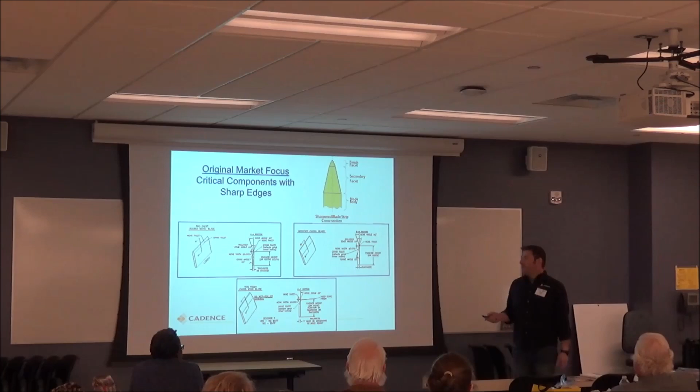Some examples of the stuff we make - these guys here that look pretty gnarly are for extrusion cutoff, so pipe and anything that comes out of an extruder gets cut to length that way.

These guys here are winder blades. I get excited about winder blades because they're meant for cutting things like Oreo cookie film and other really thin films that come off the roll - the rolls are typically about 88 inches long, and these blades stand up and basically slice it. Then we have other blades called slitter blades that slit them to a discrete width, so you're left with a rectangle of film.

There's some ones on here I don't remember what they are - I think this one cuts the heat shrink wrap you see around the top of a mayonnaise jar. Yeah, you can thank me for that. As they put that film around, they heat it, and right after it's in the heating process, this blade comes in and slices the film, then it heat shrinks the rest of the way around.

But they come to us, they shop with us. We're not the cheapest around, but we know how to make a keen edge, and we're willing to do it to whatever shape you want. That's kind of our primary objective here.

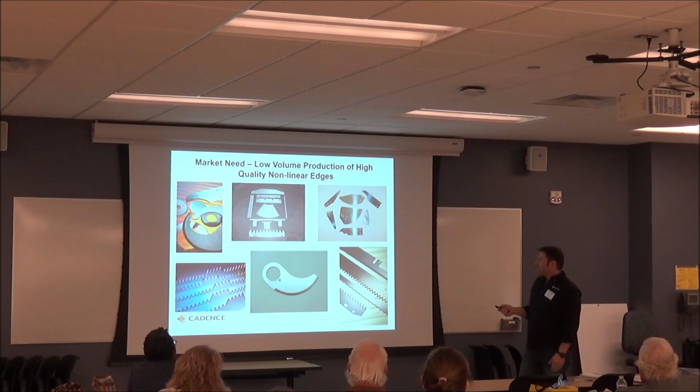So how do you sharpen an edge? These are grind wheels here. Have you ever ground anything on a bench grinder? Whenever you grind, you get what's called burr - basically it's the material that you plow out. The roughness of your wheel digs in, plows the material, and carries it out to the edge.

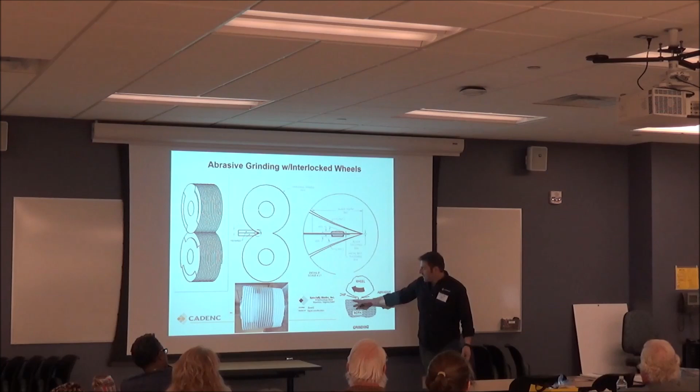It depends on the hardness of your material. It'll either come off in little teeny tiny particles, which is much easier to grind, or if it's soft, like 300 series stainless, we actually wind up digging into it and plowing it like plowing a field - so instead of particles coming off, they just squirt toward the edge. It's actually more difficult to grind a soft material than a harder one, in our experience.

But what you chase to the edge is burr. Now, our electrochemical edge enhancement process is one of our methods to get rid of burr, and it's gotten us out of a bind in a number of ways - it's won us many businesses because of that process. So we're not telling anybody how we're doing it. It's our secret sauce. We're going to ride that train.

Speaking of secret sauces, this is a composite grind wheel here, ground or shaped in a conical form, and it does not run parallel - it's not constrained parallel to another wheel.

Sorry, I'm getting ahead of myself. Let's finish this up here.

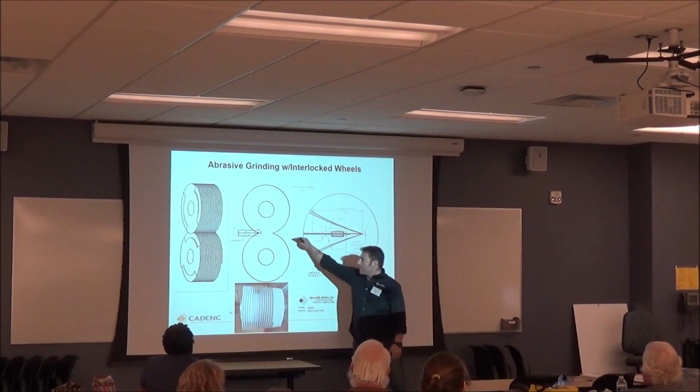To get a double bevel edge where you have a sharp top and bottom, one of our methods for getting rid of burr and sharpening at the same time is we put the part on a fixture that sticks out, like this little duckbill thing. It sticks out here, and we basically plow it right into the nip point, what we call that, in between the wheels. How do we get the wheels to run together at the same time? You see how this has got like a thread, kind of a curl shape through it? The wheel on top has a right-hand thread, the wheel on the bottom has a left-hand thread, and they intertwine like this, so they can run at speed, and as long as they stay synchronized with each other, they'll never make contact.

But you can see where my knuckles come together, there's a nip point. So to change the angle of your ground edge, you simply open up the wheels or push them together, and it changes your included angle.

So I had showed you before, there's the grind, and as you can see, the hone was a much smaller angle in there. We do that on two separate pairs of wheels.

But the guy I work for said, hey, I got this idea, what if we tried to do that all with one set of wheels? So we take a couple of grind wheels, bond them together, and then shape them. And this was it, so it's actually kind of a taper. There's a slight taper to it, and it doesn't run parallel to the one on top, they actually run at a slight angle to each other. We're putting the strip through it, and as it runs through, you're producing the grind, and then you produce the hone because your included angle inherently changes.

Mind-blowing for me, I was like, can you do that again? Because I still don't follow you. The guy lives outside the box, and I love him for it, I really love him for it. So he explains it to me again, and I was like, one more time for me in the back, right? Can you do this one more time? And I get it, I'm like, oh. And he made this huge Excel spreadsheet, and he tried to figure out how this was all going to work.

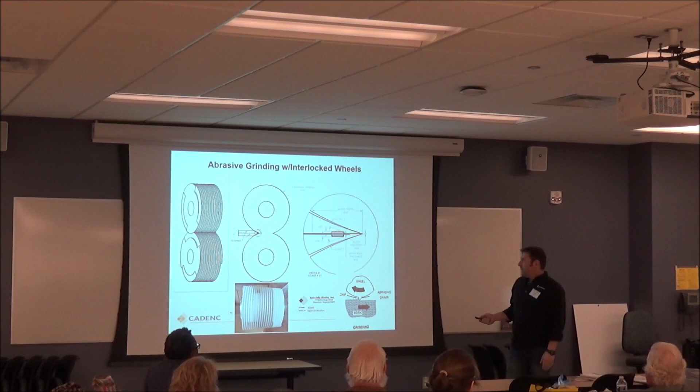So we actually got a patent on it. We've got a couple of guys that have patents on a couple of things there, all in trying to solve a problem that we have in our little niche of the world.

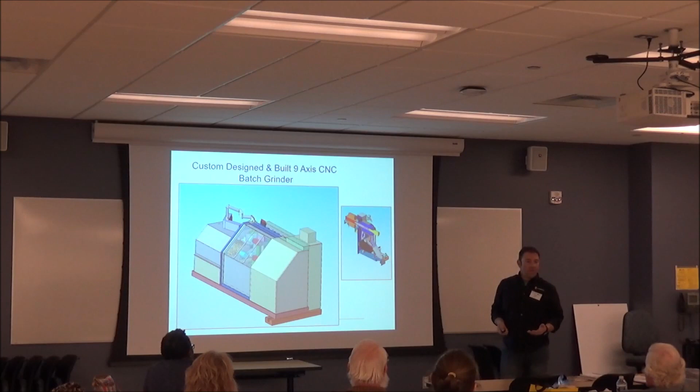So all designed in-house and built in-house by us. You can't just go buy a grinder that we want, you know. So there it is, right there, there's the one that you saw the model of. We finished building this one here.

I'll tell you something about these guys and ladies that run the machines, dare I say they're artists? Generating a sharpened edge, there's no standard for sharpening. The closest we have is a cut force, so how much force is required to pierce said blade through such and such material. That's the best we have.

So we have customers that'll say, well, we're trying to cut the human eye, so here's some tissue type material, we want you to cut that, and we need it to be below whatever force. So we have a load cell, and we'll basically cut multiple cuts and show them what we come up with and change the design based on that.

These folks here, they know what they're doing, and they're good with trig, because you have to be pretty familiar with trig to get through this stuff. And I don't know, I like calling them artists because I think it's a pretty beautiful thing that they've done, but I get excited about machines and blades and stuff, so, yeah.

So we have a customer making end effectors for the Da Vinci robot, which is a frustrating name - it's actually not a robot in the least bit. Have you seen the Da Vinci surgical robot? The surgical robot is a misnomer. I get frustrated with this, but I didn't name it.

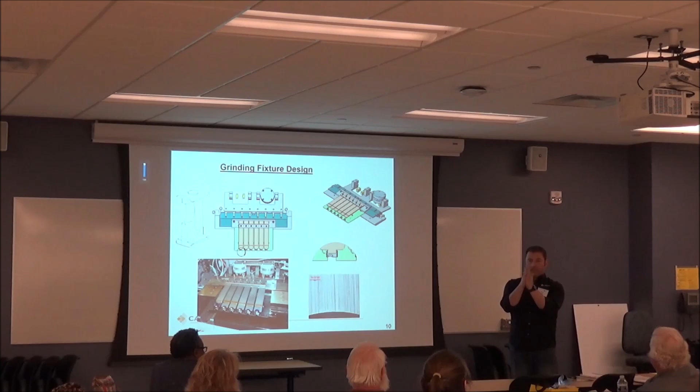So how we do that is the blade must be actuated by a push rod. In our case, the push rod is required to be 40 thousandths thick, 0.040. The problem is 40 thousandths thick is kind of hard to bend, especially with the way the machine articulates in the tool. So what we've done is laminate 4 pieces of steel that are 10 thousandths thick, 0.010. The laminate allows it to slip like this, so it's much easier to bend while you still have the strength of the cross-section material.

Just another fun thing, right? So how do you attach 4 pieces of steel to the back of that thing? By the way, that thing is 46 thousandths thick, so we're attaching 40 thousandths to 46 thousandths thick material.

It'll be laser welded because we discovered that's the best method. If you're familiar with welding, basically you're bringing 2 pieces of material together and trying to get the joint material to go fluid locally, to mold it together just in that one area. We're not very good at welding - I'm not very good at TIG welding - so we use lasers because we can control them. I'll talk more about lasers shortly.

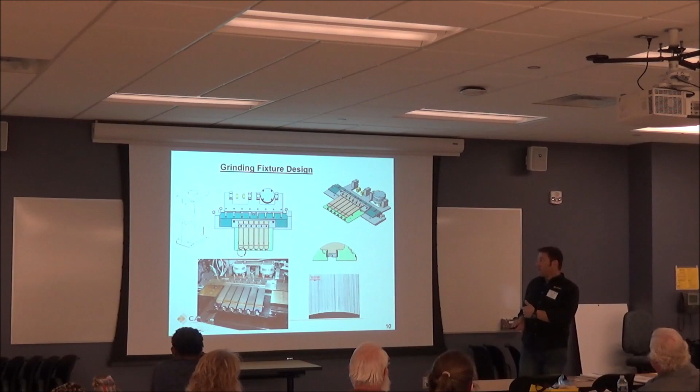I put this in thinking it would make some sense. It's just some fun talking points.

Another interesting thing that happened - you guys familiar with the, words escaping me now, the bag, colostomy - it's gonna hurt, man, if I had to keep going. All right, the colostomy bags - patients with colostomy bags had no practical way to reverse that.

And the company that had an idea for a way to reverse this, to recouple the bowel sections back together, they said, we need a blade that looks like this. But the problem is, on this plane, across the surface, that cutting edge has got to be as flat as possible. We haven't found anybody else that can make that flat.

The reason why is, as you grind this facet around the edge, imagine you've got your tube here, and you're grinding with a ball wheel along that edge. If the tube is not perfectly round, if it's kind of heart-shaped or has a teardrop shape to it, as you maintain that ball position, you're going to rotate and move. The facet will move in and out and be all wiggly.

They were like, well, that can't be. But with the stainless we're working with, you can't make it that round. You just can't. So they said, you guys get 100% of the business because we haven't found anybody else willing to do it, if you could figure out a way to come through with this. So we're like, yeah.

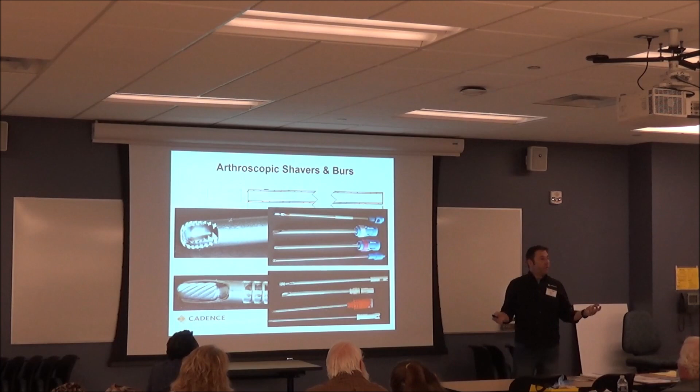Yeah, I'm kind of already blew through that stuff.

So the previous slide where I was telling you about that little tip, we're going to weld it to a tube. The tip is about that big in diameter and about that long, kind of bulbous on one end. When we pick it up and go to weld it to the tube, it might be that long or that long, depends on which product line they want us welding.

And they wanted like 2.8 million a year. So to have a person stand there, it's torture. It's punishment to have them pick it up, put it in the machine, close the door, hit the start cycle. Like 12 seconds later it's done. Take it back out, put a tip in there, close the door, start cycle. It's painful, and really it's not a good use of a person to do that. They're not happy with it, and you're paying them a lot of money to stand there and do that.

What's the best thing to do? The best thing is to automate. Our philosophy at Cadence is nobody ever gets fired because automation comes. We're going to use you for a more skilled role. You have given abilities to do way more than just pick a part up and put it over here. So we're going to use automation.

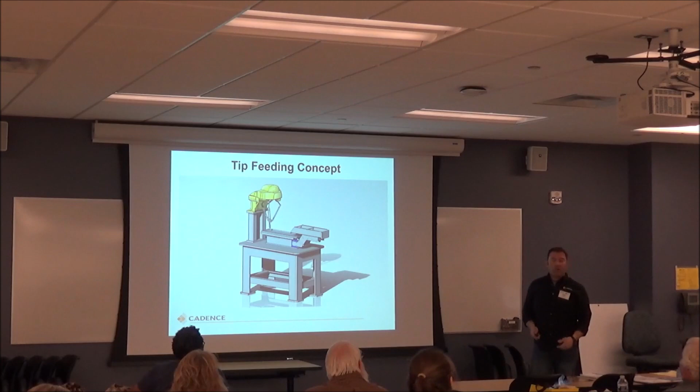There he is, the jellyfish, put him on the table. You see how it's got this little red backlight right here? How do you pick up randomly placed parts? Because these things come in a bag and they're randomly placed. Instead of sorting them and trying to make them all go the same direction, which is hard to do with a bulbous end on one end and open on the other, I said why don't we just put it on this table, use a camera, identify the profile, and then send the offset—where it is and the rotation it's at—back to the robot, and it'll just pick it up. That was painful, but I got it to work.

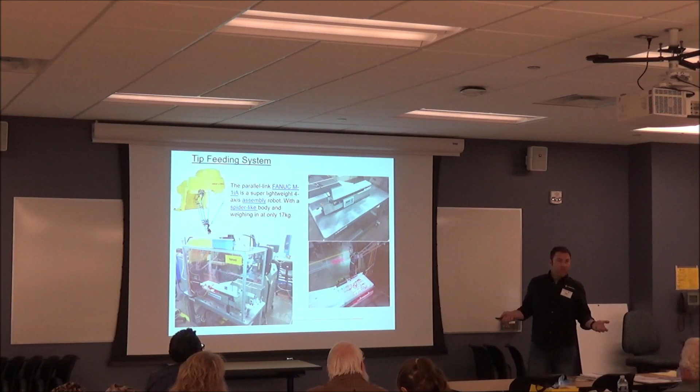So there he is next to one of the machines we were building for doing this. That's actually a machine we bought and modified—the laser welding thing I was telling you about. You can't just go buy a machine that laser welds these things together like this, so we had to make it on our own.

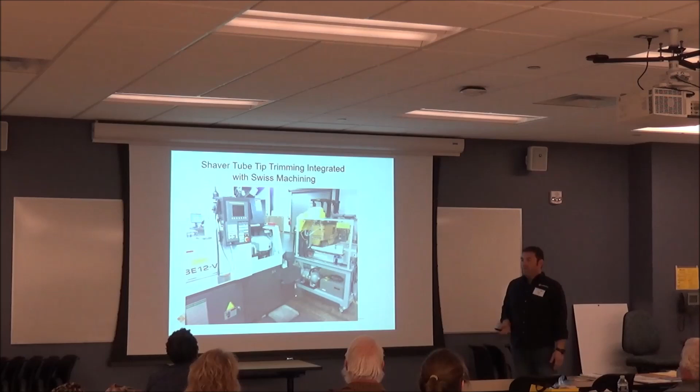This is another automation project. Remember the legs I was telling you about for the linear cutter? I said we've got to weld these 4 legs in the back of this bad boy. So we own a facility in Wisconsin that does stamping, a facility in Rhode Island that does a lot of machining, a facility in Pennsylvania that does final assembly work, and we just bought a facility in Connecticut that does laser welding. We've been trying to vertically integrate ourselves a little bit more.

So in Wisconsin we have a stamping house, and the stamping house stamps out those legs, 10 thousandths thick. If we're making, what was it, 2.7 million a year, each one of those bad boys gets 4 legs, so we've got a lot of legs.

What they had was a stamping press. If you're familiar with a stamping press, basically it just stamps out the shape from the material and barfs it on and down the road here. They had people sitting there basically stacking them, because as we weld them they all have to be in the correct orientation, and we like to have them stacked. So they had, I think it was 8 people sitting at a table, and their job was to take parts out of the bag and stack them up.

They had to be about 350 on what we call a bayonet, which is just a plate of steel. And they said, can you come up here and see what we can do about this? I was like, sure. I've never been to Wisconsin when it's warm. I hear it's great, but I only go somewhere between November and March.

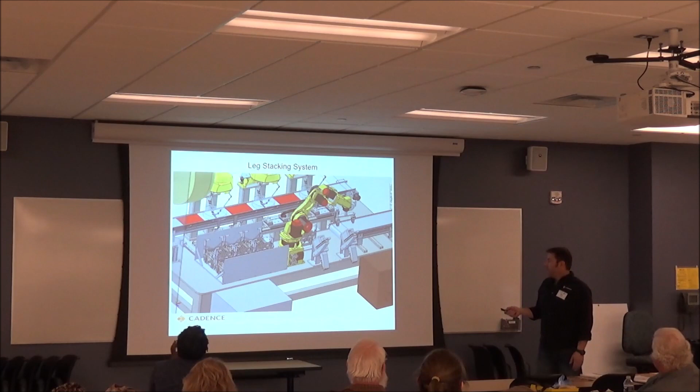So here it is in real life. There's a stamping machine, and it just puts them on the belt, and they just cruise through. One of these 3 jellyfish picks them up. There's 3 of them because it comes out just that fast. I think they're 280 hits a minute, I think is what it's running at right now. And the stamping press can go faster, but the robots can only go this fast.

I was like, how many robots do you want? I was like, well, we put 12 of them up here if we really want, but what makes sense? All right, I'll show you the videos later.

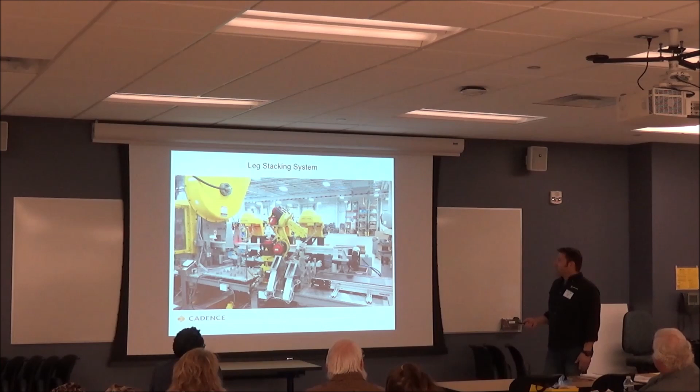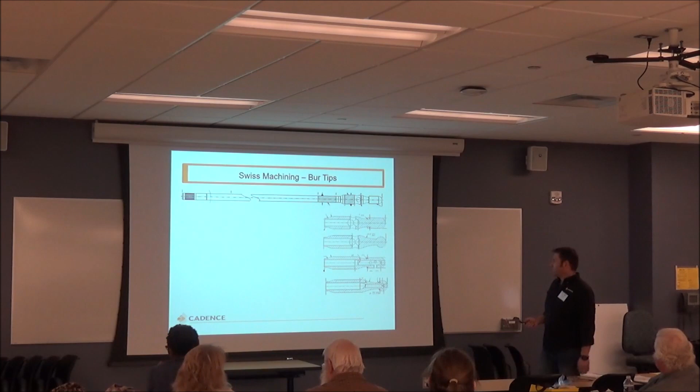So these are some burs that we make the blanks to, I was showing you before. We're going to weld these things in tubes for our customers. That's a machine we purchased, and we wrote programs for to make it on.

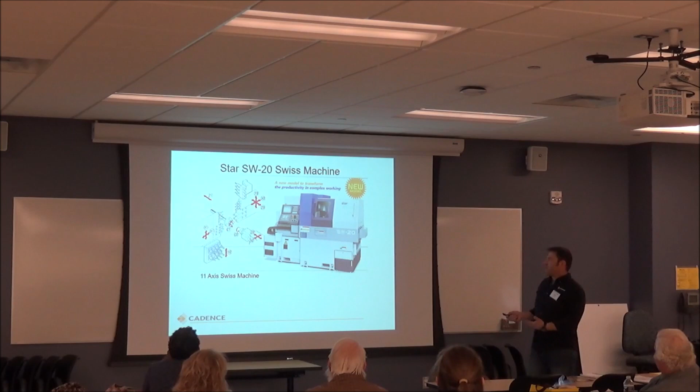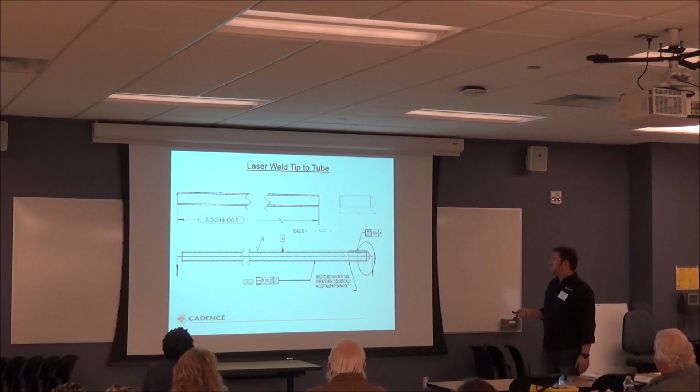Yeah, there you go. Laser welding. So the inside diameter, there you go. It's got to be concentric over here within 6/10, 0.006. So I was wrong, not 0.004. So welding, we like laser cutting.

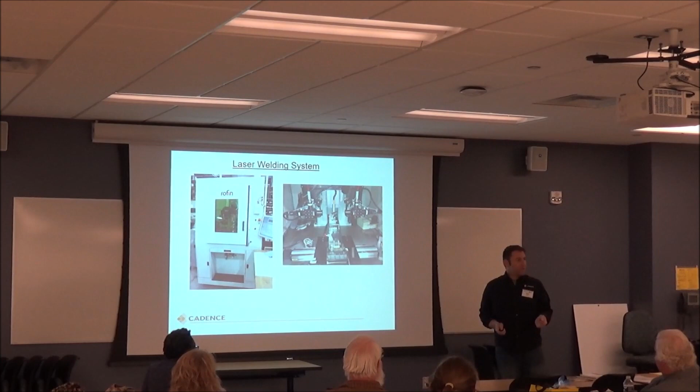Spot diameter on the laser welder is around 0.03 inches, I think. So there's a lot of energy through here. So there we are, where she's actually loading and unloading parts, welding here.

So when we first got into laser welding the tips and the tubes together, we had this idea, we thought we really want to try this idea out before we actually commit to spending a year or whatever it's going to be designing a machine. So we bought this machine, which was I think like $80,000 for a machine. That's pretty cheap. So it was cheaper for us, think about that, it was cheaper for us to buy an $80,000 machine than it was for all of us engineers to design a machine, okay? We bought this, and we basically took all the stuff off of it and we outfitted it with lasers. So here's laser heads.

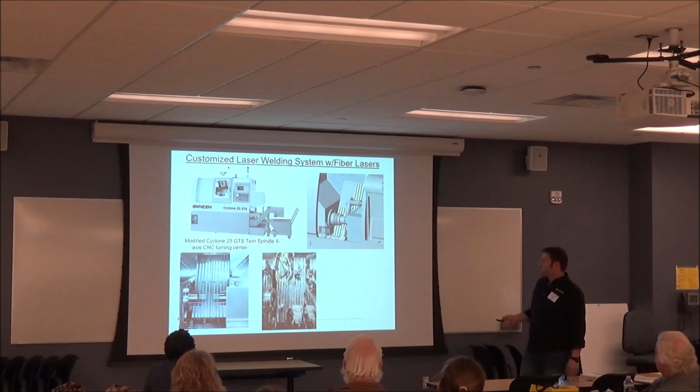These are independent slides, independent spindle heads, and we bring them together and weld them together with the machine. We tried it out and we were like, hey, this actually works.

The machine didn't have any way to align the spindles together, there's no adjustment. So my friend and I made a little tool that would allow us to index the spindles together to see how not parallel and not concentric they were. And I ran around with a wrench and adjusted the base of the machine to get it to twist one way or the other, just to kind of sneak it in a little bit. We got it pretty close.

Like your washing machine. Yeah, exactly. It was not 0.004 inches. I'm just going to leave it there with that, but it was better than what it was.

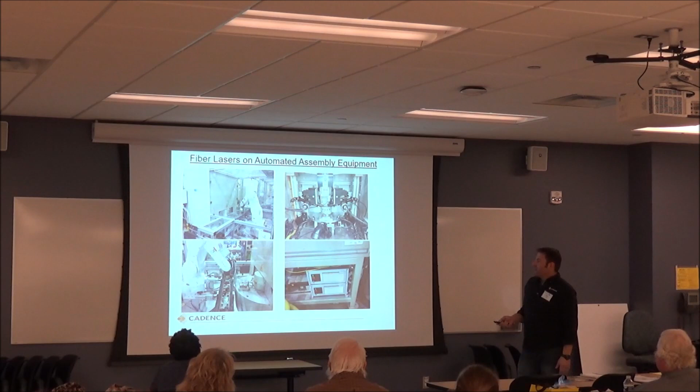Everybody's trying to get small, so we're trying to get small with them.

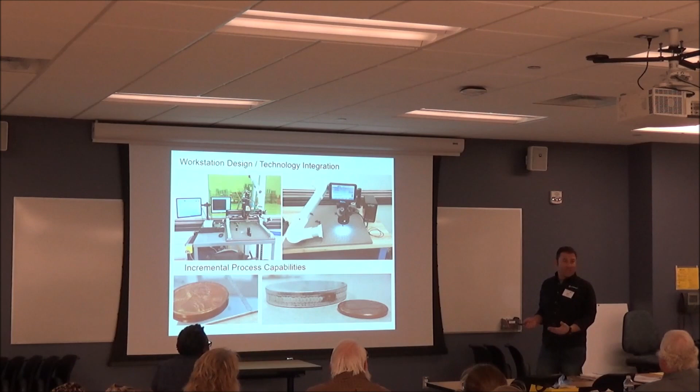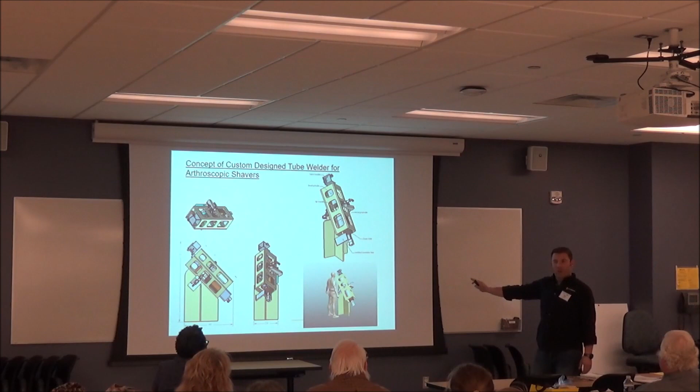Here's the reality. It's still got that triangular stability housing to it, but it's actually laying horizontally. Laser optics in there, so we're doing the welding. There's the business end right there. There's some feed tubes into this hopper.

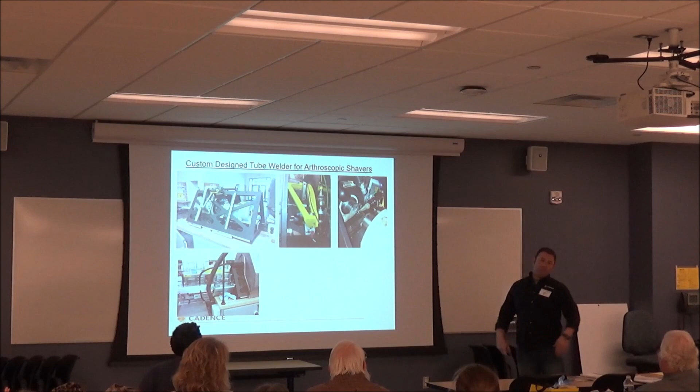So the interesting thing, you guys are teaching, you share with students - you get locked in your mind with a certain idea. You just can't get out of it, and you just feel like, well, that's it, you just can't do it. But failure really isn't an option, and especially if you get paid for it, it's really not an option.

So this little thing has a fun story with it. I could not figure out how to feed tubes up the back of the spindle and have them come out singulated and push them off the spindle and everything. So we went to the little Mexican restaurant down the road from where I work, and they had one of those little toothpick dispensers. I rolled out to get a toothpick. I was like, wait a minute.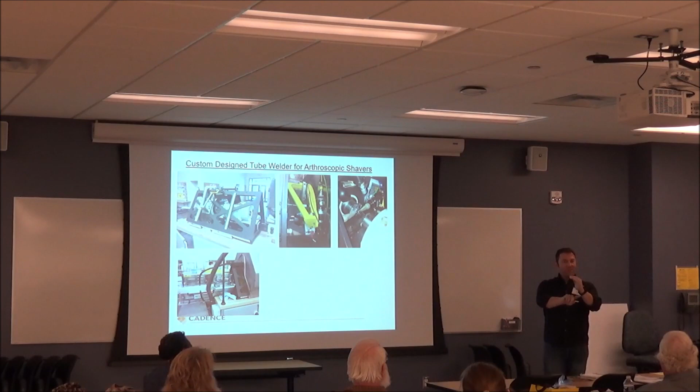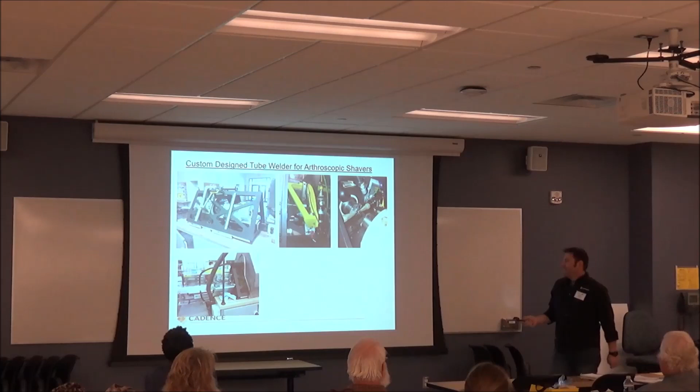So that's a toothpick dispenser. It's highly modified, but it's a toothpick dispenser. What I found playing with it was all the toothpicks on my little tubes kind of made an arch around the drum, the rotating drum that I was using to feed it. So I had to have little exciter bars that would go up and aggravate the stack and make them all fall right down in there. I was like, you know, inspiration comes from everywhere, doesn't it? So I stole somebody else's idea, and that's fine.

So this is a concept I had where we were going to weld with a robot, because how exciting would that be? It turns out the robot's got a little bit of the caffeine wiggles at its extent, so it wasn't the precision we were looking for. This was my idea to try to come up with that.

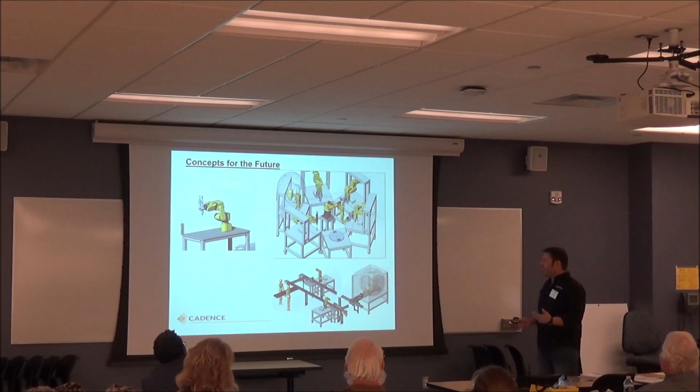Some final thoughts for you guys.

Innovation is more about discipline than creativity. It is creativity, right? You have to see the next picture. How do you know what the frame looks like on your next picture? You have to know where you're at. You have to know what exists to be able to drive to the next place. So before you start trying to paint in what it looks like, you really do need to have that frame. You need to know where you're going and have a general idea of where you came from.

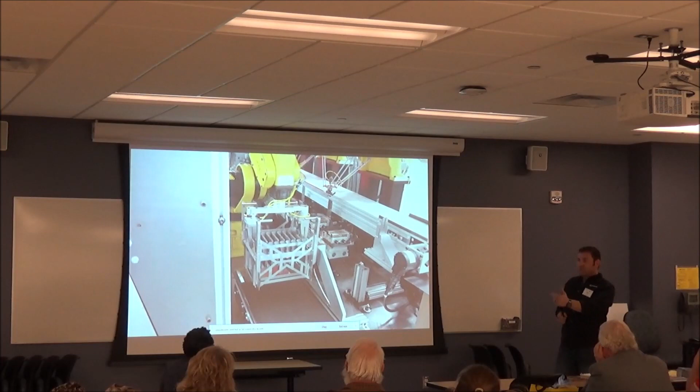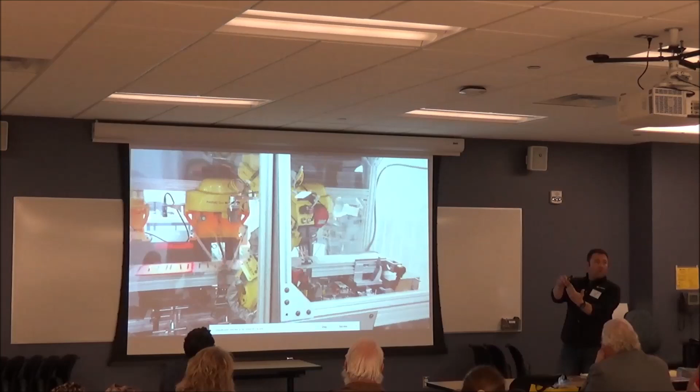So I used a laser distance probe, and it just gives me a discrete value, and then I do some math inside the robot control, and the robot knows to move 0.1 millimeters this way for this bayonet. After the robot swaps it out, the next one it measures, and that's how it figures it out.

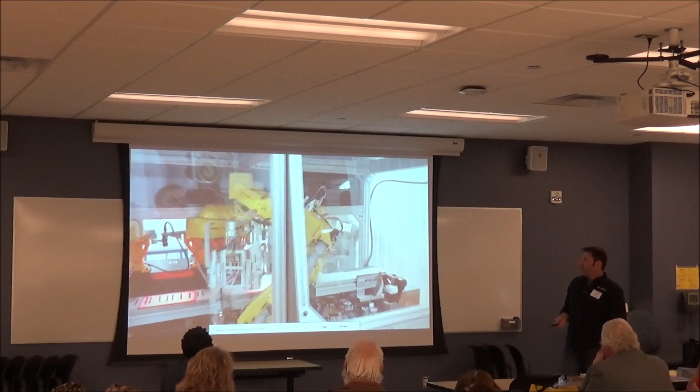So here's the robot coming to get an empty basket, putting it over there where he can load it. This was a hard move - I kind of painted myself into a corner. The enclosure is really tight. I wanted that to be a little bit more of a suave move, but when you're stumbling around in the dark looking for the bathroom door, sometimes you just fumble around.

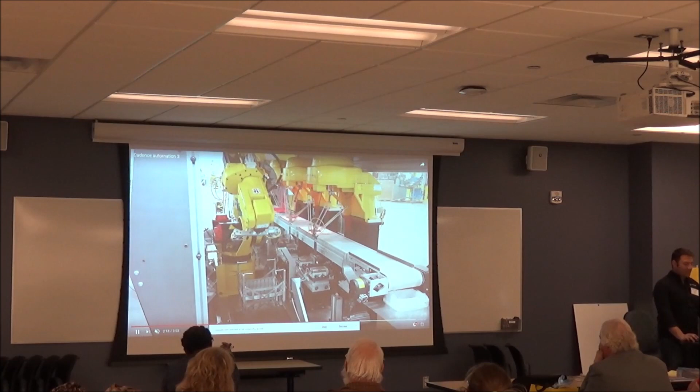That guy's fumbling around, so he's picking up an empty bayonet and moving on with it. He's checking presence to make sure the bayonet exists. Got one more little snazzy move there - they give me a hard time sometimes about it, but...

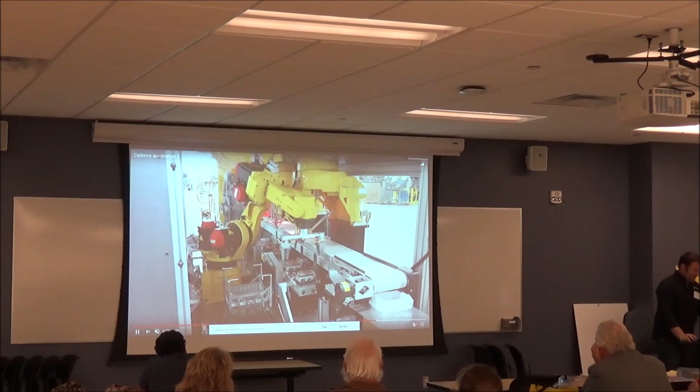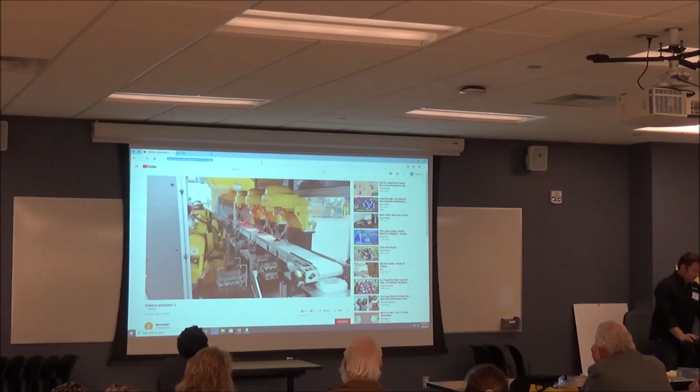Okay, one more. Do we have time for one more, or should we quit? No, it's only a few minutes here, we can watch it. No, plus the videos really make it. Yeah, there you go, so the videos are fun. Come on, no ad, no ad.

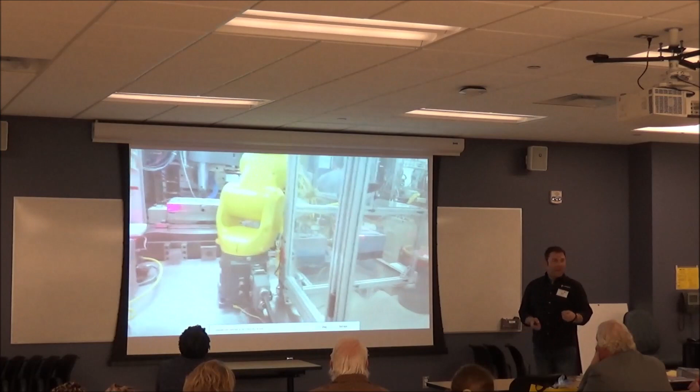All right, yeah, so we got to start in the beginning here. So this guy's job is to make an assembly called a staple remover, for removing staples for facial surgery. So you can't have tear out of the flesh - the staple has to come out exactly the same path it went in.

This particular assembly has a mechanism that basically bends the staple of that particular size. We make a lot of these things, and in this case all we're doing is taking the blanks, one upper and one lower, and injection molding the handle. That's all we're doing here - nothing secretive at all.

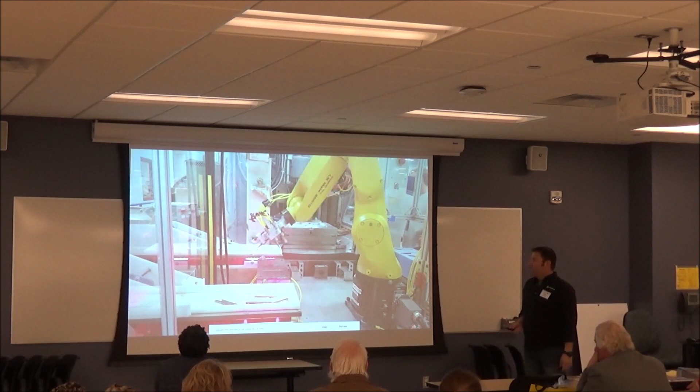But the people running this would have one person run it for about 2 hours, then cycle that person out and put another person in, because it was exhausting for them to stand there and fish out the parts, put them in, and when it swings back around, take the parts out, hang them up, go get more.

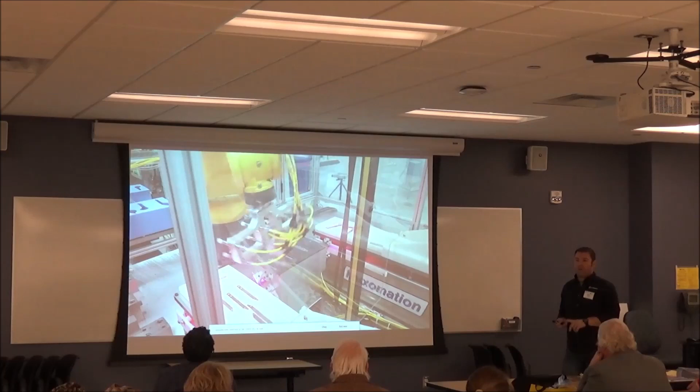And their cycle time as their shift would go would just drop. So this robot moves slower than a person does - a person can go a lot faster, but that's typical for what I've found in automation: a person can go very fast, but only for a brief amount of time, whereas the robot just continually does the same thing. He doesn't have to go to the bathroom, doesn't get hungry, doesn't have to call his mom. He's always there, and he'll continue to do it for both shifts - you don't have to pay for a second shift person as well.

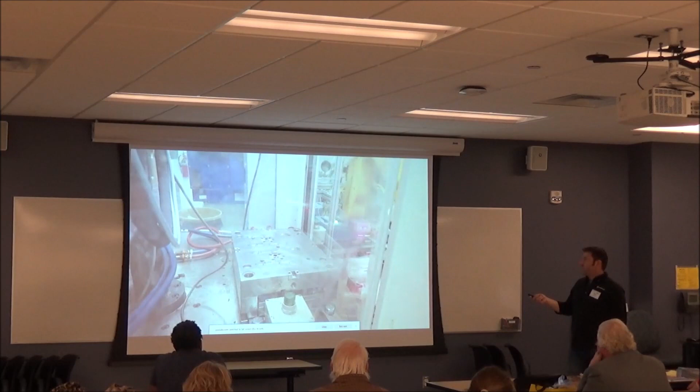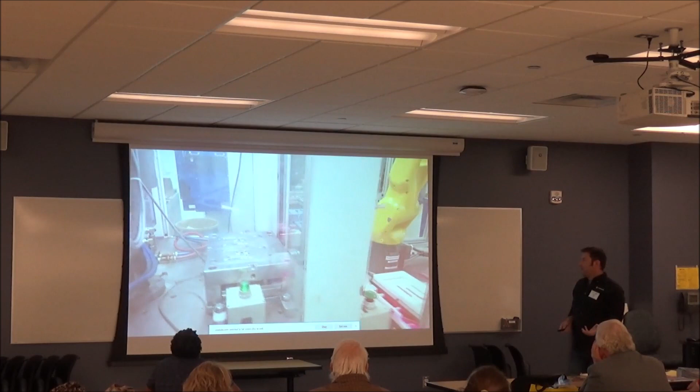So he's just taking it out of the molds, putting it in this basket over here. The basket fully rotates around, and an employee has to empty it out. So loading them in there, there's an interface with the machine - did the parts actually get into the pockets? Yes, then proceed. In this case, it found an upside down part.

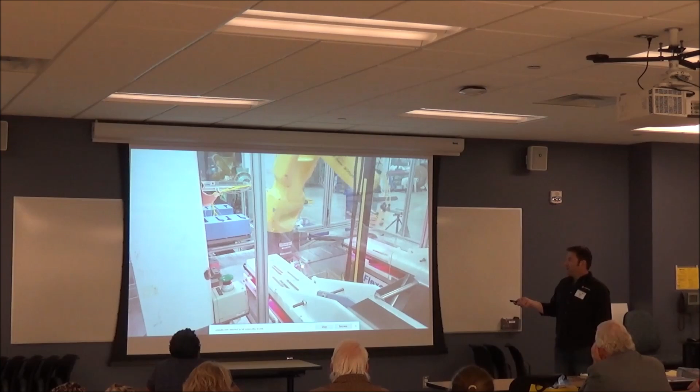I had to add that thing later, that's a fun story. I thought I would be able to bump the bottom of the table, these little shaker tables we made - like you bump the bottom, the parts would flip over. Nope. I mean, if you bump and bump and bump them until you're like, really? Eventually somebody flips over, and then you gotta do it all over again for more parts.

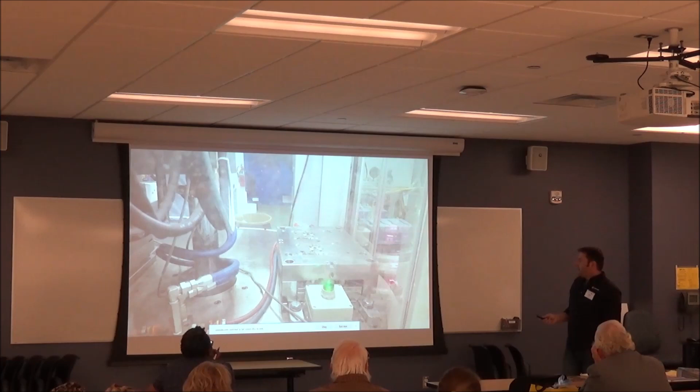Just not appropriate. So I set him up to see the part right side up and upside down, and he picks up an upside down part, puts it in that little rotary flipper, flips it, and picks it up right side up. Yeah, interesting stuff with robots.

This guy's actually running 4 programs at one time in parallel, pinging vision and moving the tables accordingly while the robot's in motion, not in the field of view with the cameras - 2 cameras running in there.

Is this at your facility in Stanton? This one's in Wisconsin. That's in Wisconsin. But I like cold. Yep.